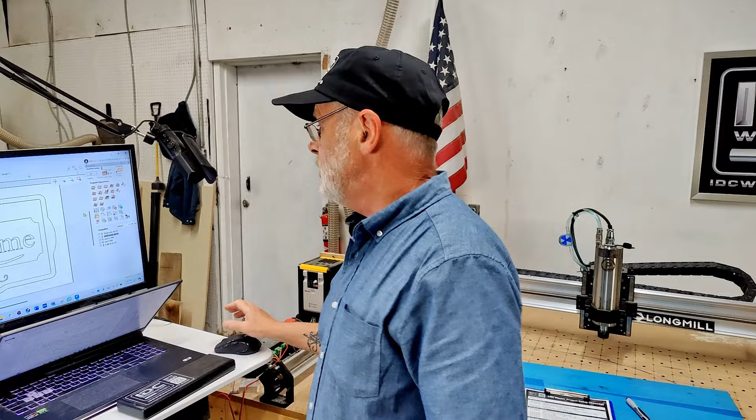So we're going to go back and take a look at this. What we're doing is we're double checking everything first. I'm in the Vectric software, which is what I recommend, and I'm going to go into the job setup, and now we're going to take a look at the material size that I've set up. So I have 24 inches wide by 16 inches tall by 3/4 of an inch thick, or 0.75.

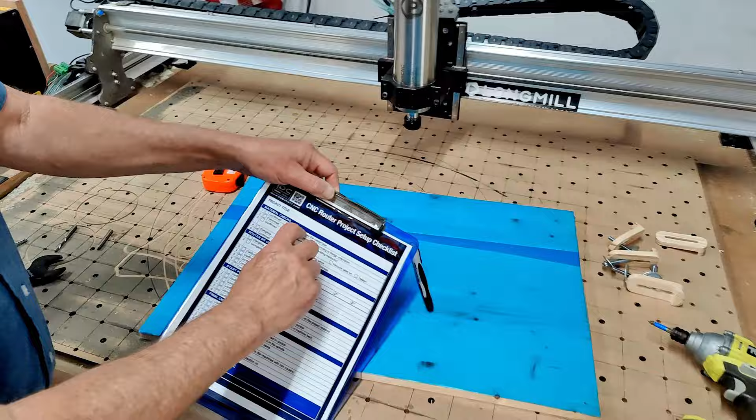So the very first thing I'm going to do on this checklist is, first of all, put on the top what this project is. It's a welcome sign. And the first thing is material size matches the design size.

So we're going to do a quick measure. And the material is 24 wide by 16 tall. And we're going to check the material thickness. Now, when you're checking material thickness, you want to use a set of calipers rather than a measuring tape, because you want to get a little more accurate.

You want to make sure that your router bit is not going to plow deep into your spoil board, and that's why we use calipers. If you don't have calipers, you can get a set off the IDC Woodcraft website. It's a very large display set of calipers, and these will give you a nice accurate measurement. You have to have calipers in your toolbox for this.

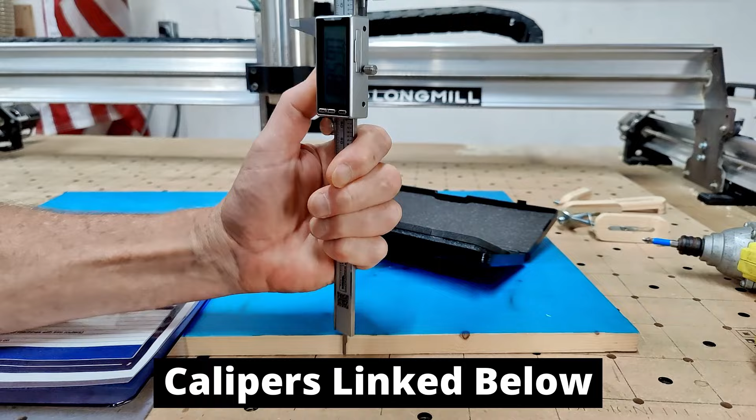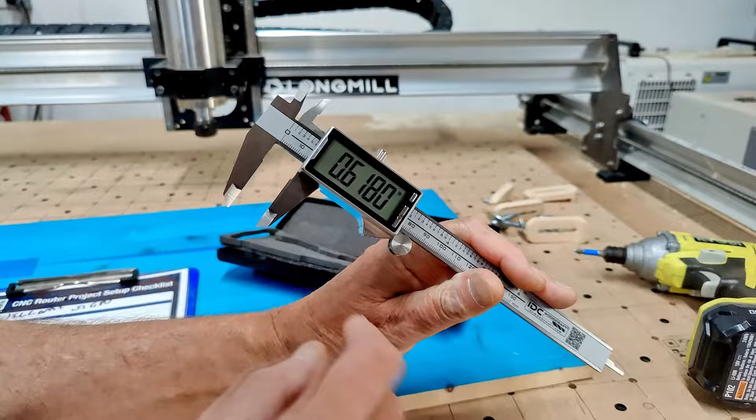So we're just going to do a depth gauge measure. First of all, you always want to make sure your calipers are zeroed out, which it is. And then we'll do that depth gauge measure, and look at that - this material is not 3/4 of an inch thick. So I'm going to do a couple of checks and just see what all I've got, find the thickest part of it.

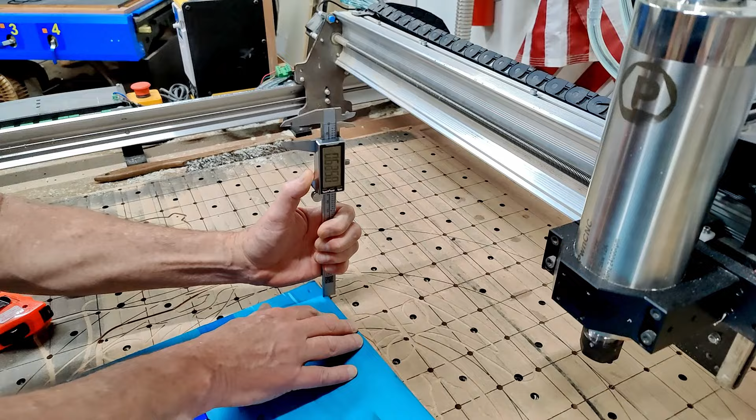And we are at 0.65 here. So what I'm doing now, just by doing this, is I am finding the high point on the project material - 0.63. Now this is telling me a ton of information right off the bat, that I have a high point, and that high point is where I need to set my Z0 at so I don't carve into my spoil board. And that high point was up in this corner right here, so I'm making a mark there.

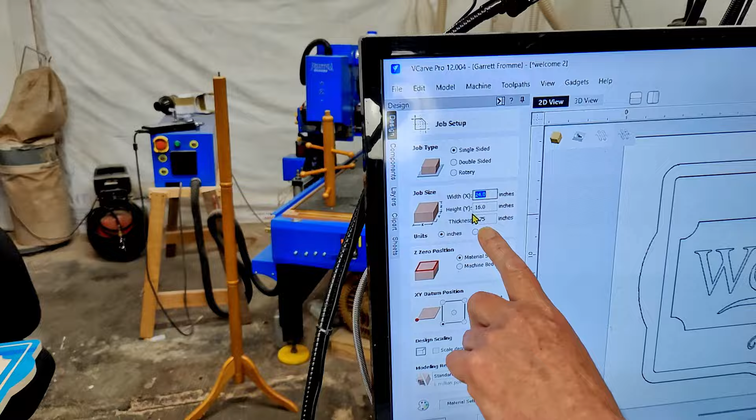So we have now double checked the material size, but we know that it doesn't match what's in the design. So I got to modify the design for that material size and recalculate all my tool paths. We're just going to go right back into it, and we're going to change the thickness to 0.65. I'm going to put in 0.654, so we're going to back that up and recalculate.

And it says, warning, the tool will cut through the material. So here's the first thing: now that I've done all the design work on this project at 0.75, all my tool paths are now set for 0.75. Now that I just reduced the whole thickness by 0.1, that means all my tool paths are now wrong. So I have to go back in and correct all the tool paths.

So we're going to take care of that right now, and then we're going to get back onto this checklist. Okay, so I checked off item number one off this list. The next item on this list is making sure the material is oriented on the machine according to the design.

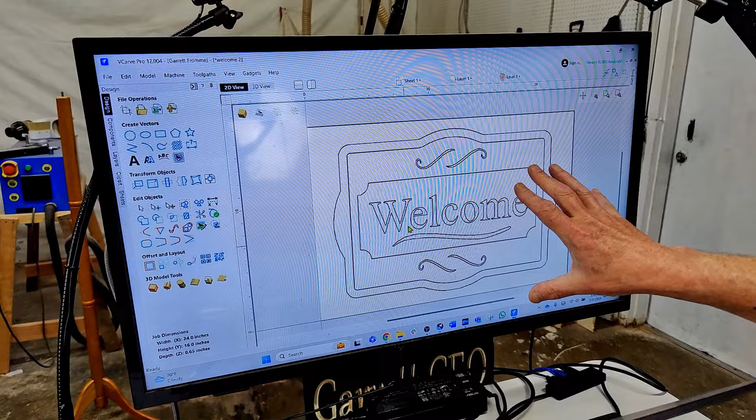So I've got a 24 wide piece of material, 16 inches tall, and that's showing on the screen here. So what this is telling me, and what it's confirming for us, is how this piece of material here needs to be sitting on the router. Is it going to be like this, or is it going to be like that? And I know that it's like this because I've just double checked it on the software, and that means that this is going to be on the machine like this. This long side is along the x-axis, so now I can double check that.

Now it comes into our clamping. We want to make sure we're clamped down, and the whole part about this is making sure that we are clamped down securely. This is the point where it gives you some thought on this project. Now I've carved this already before, and what this is doing is making sure that we have taken into account the cutout of this project.

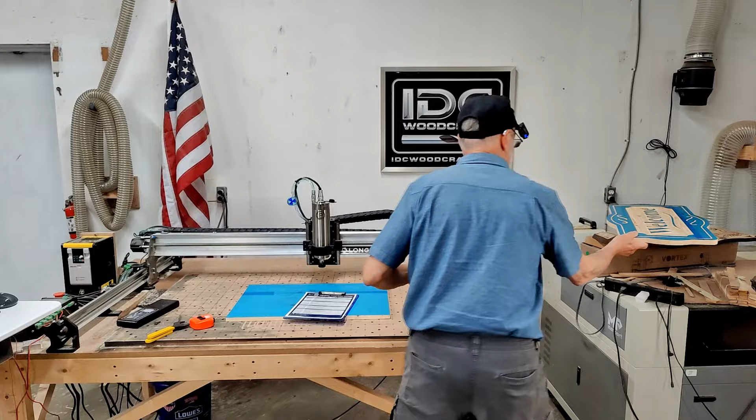Do we need to use tape? Do we need to use clamps? Do we need to use both when we cut this out to keep the project secure? So in this case, we only need clamps because I have tabs in the project. So I am now going to put clamps on the project to hold it down, and then we'll continue.

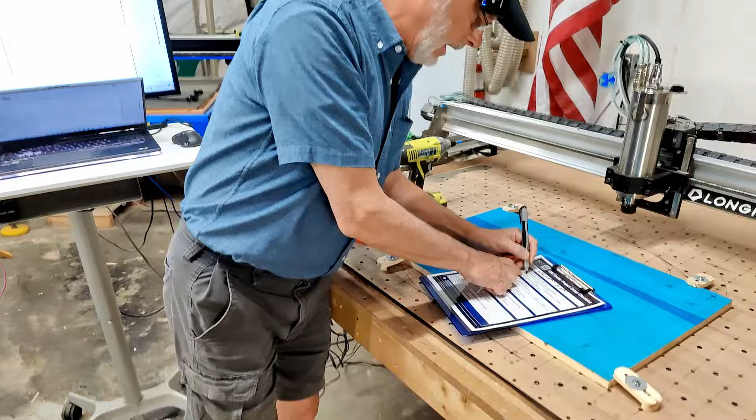So on the checklist, I am using clamps only, and I'm checking that off on the checklist, but I'm also going to make sure that the project is nice and secure. So I'm giving it a lot of force, and I'm actually jiggling my table. So the project is held up and held on the table very tightly. So I'm going to confirm that.

And what this has also done is given me some thought on where I'm placing my clamps based on where the tool is going to start, what corners it's going to start on. And that is something that we're going to be checking on later to make sure that we understand that start point. So now we know the project is secure.

Now the next step is surfacing the project. Obviously, I can't surface a project, but on here is once we get the project set down, the material is surfaced just before we start the carve.

So I have already surfaced this project, and then I put it back on. But if you are putting a piece of raw wood down, then you will definitely need to surface it, and just want to make sure you're going to surface it. This gives you thought about your carve - if this is a really fine, detailed V-carve, then surfacing is really important.

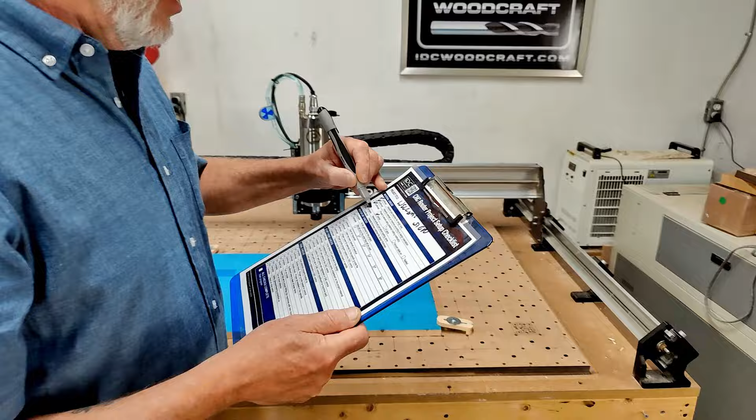We already know that this has a certain high spot on it that's about a 0.02 difference, and that can actually make a difference on a carve. This particular one, it won't, but at least this checklist gives me some room for thought on that - so checking the material surface just before starting the carve is one point where you just want to consider that.

And then finally is the material thickness matches the design thickness. I actually checked that, and we already found that the thickness was off. I already adjusted it in the program, so now we can double check that, but I'm going to confirm it - this is what the checklist is for. So we're going to go back into the job setup and make sure, again, that I've got the right thickness set up here.

So this is what we have done - we've completed the material checks. In this material check, we have confirmed the material, double-checked the material, and checked the thickness based on the design. We know that the material is oriented on the machine as it's supposed to be oriented, and we paid attention to the clamping method and made sure that we've clamped it down appropriately.

The next thing are the router bits, so we're going to now step into router bit checks. What this gives you opportunity to do is make sure you've got the right router bits selected, they're in good shape, your collet has been cleaned, and the first router bit has been installed in the machine, and a couple other things which we'll get to. We're just going to follow this checklist in order.

All the bits gathered for this project - so all the bits I've got to use for this project is the ultra clean cutting 90-degree V-bit, a 1/4-inch down cutting end mill, and the 1/8-inch down cutting end mill.

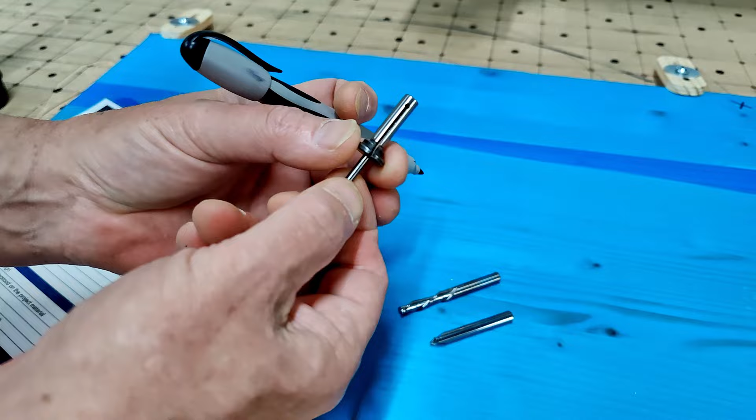I have this collet here. This is a high precision collet that you may want to get if you're using the smaller adapter collets. This is much better - it's machined with much higher standards, so you may want to check that out.

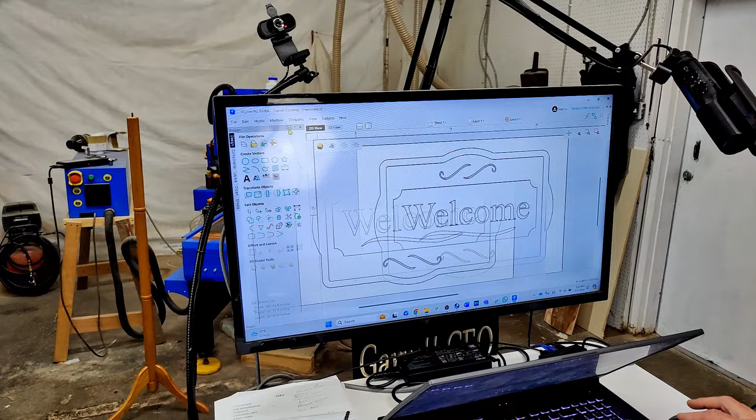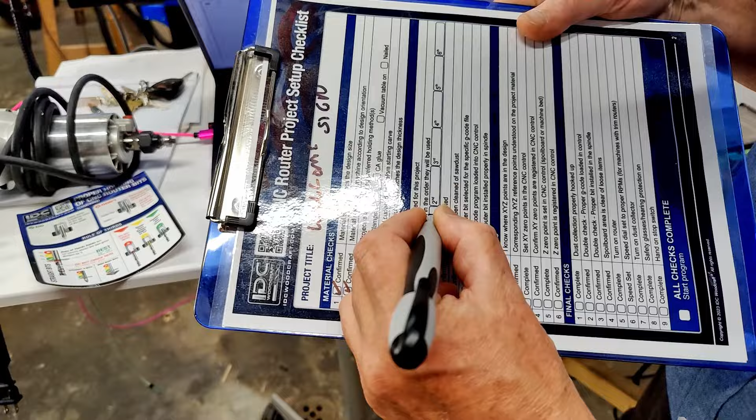I've got listed right here the name of the toolpath and the router bit that I'm using. The first toolpath uses a down cutter 1/4, the next uses a down cutter 1/8, the next two uses the 90-degree V-bit, and the final one uses a down cutter 1/4. So I'm going to mark that into these boxes: DC 1/4, DC 1/8, V90, and then DC 1/4. You can use whatever code you want so that you understand.

And so now the bits are laid out - I've got the first one there, the second one here, the third one here. I'm sorry, it's the first, see, there we go - that's why we have the checklist. First one, second one, third one, and then the fourth one. I'm going to refer back to this for the various different operations that I do, because I got to come back to the DC 1/4.

So each bit needs to get inspected. That's the next one we need to check off, because you want to make sure your bits are in good shape so that you can take a good close look at them, see if you see any chips. I like to roll them in my finger a little bit and kind of try to turn it while I'm rolling it in my finger, then just roll my finger down gently, because it is a sharp edge. We're feeling the edge of the bit and making sure the edge is still sharp. We're going to do that for all the bits, and just get a close look.

You can see this one's been used, so it's got some buildup on it, and so I'm just going to check the cutting edges with my finger. I'm pretty comfortable with that. And we'll do that with the 1/8 down cutter - do the same thing.

And that feels good as well. So my bits have been inspected. Now the collet needs to be cleaned of sawdust.

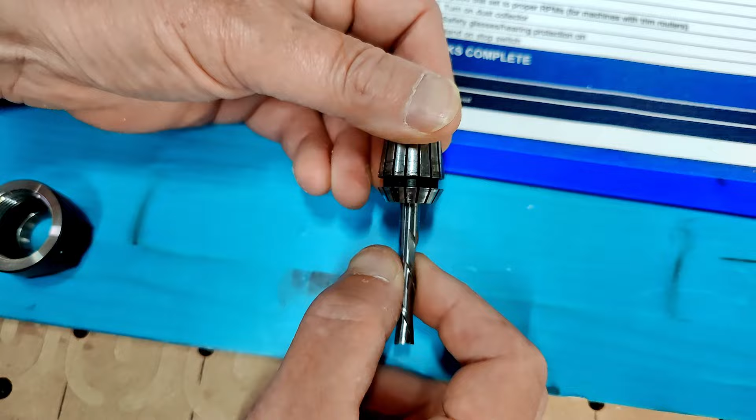This is a big thing that many creators don't realize at first. Cleaning your collet, that's the part in your machine that is actually holding your router bit. As you're doing carves, sawdust will get up into the collet, and as you take bits in and out, that sawdust gets in between the bit and the collet itself. Then you clamp down on it. That little bit of sawdust that gets in between the router bit and the collet actually acts like a ball bearing. When you start to carve, you'll start getting something called bit slip, meaning the router bit actually starts to slip out of the collet, and the carve gets deeper and deeper, and you usually don't notice until it's too late.

So every time you change your router bit, you have to clean your collet. Every single time, not just the collet, but the collet nut as well. Giving it a good close look, you can use a toothbrush to get into it and clean that out. I don't see any sawdust in there, so we are going to check that off - the collet has been cleaned.

The next is the proper router bit has been selected for the specific G-code file. I'm running 4 different G-codes. I have 5 tool paths, but two of those tool paths are merged into one. So I need to load that G-code up into my control software in order to know exactly what that is.

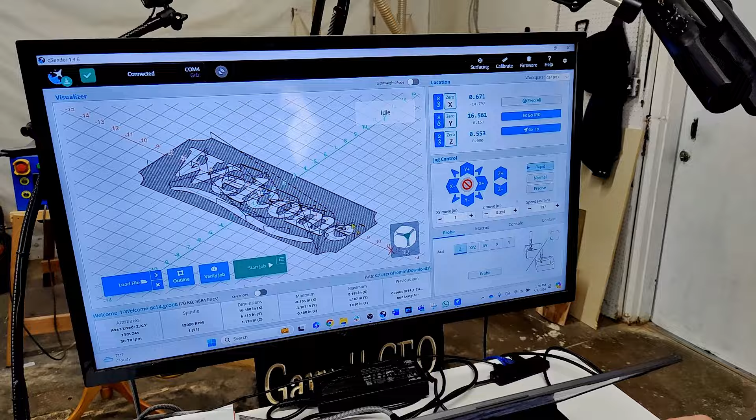So I'm going to open up gSender, and we're going to just load it to make sure. So welcome, and there's toolpath number 1. That's the one I want. And it says, let's move that. It says DC14, that's what I want. So that's the one I need to load into the software. Now I've got it there. We're ready to go, I've got that loaded in.

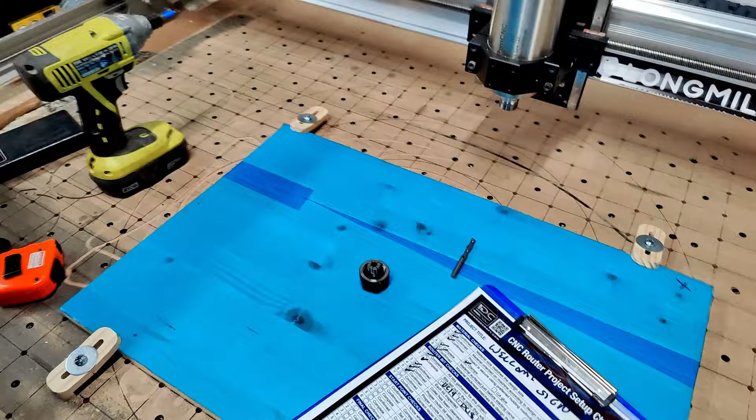So I am going to double check that. Now, one of the things is when we're doing this, we're going to come back around here. When I go to the DC18, we're going to come back to the router bit check, and we're going to start running through this again. So I got the proper router bit selected for the specific G code, which is the 1/4 inch. So I want to get the other ones out of my way, I'm going to set them to the side here for just a moment.

And the proper G code program is loaded into the CNC control, which I just did. So we're going to do that. And the correct router bit is installed properly in the spindle - that's the 1/4 inch router bit.

So basically, this is like a baby step type of list that's making sure I am following a bunch of steps. You can see already that this is forcing us to slow down. It's kind of a pain in the ass to do this kind of thing, but this is what's going to prevent you from, or at least minimize, mistakes that you just don't want to have in your carve because you forgot to do something. This is covering everything.

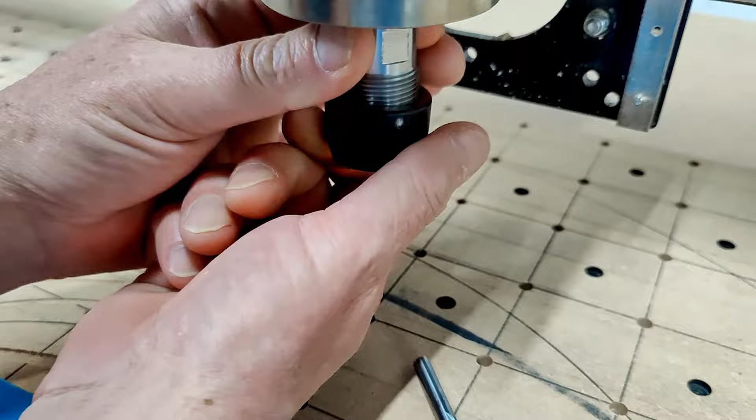So we're going to install the 1/4 inch router bit in here, and this is where we want to pay attention. Now, this list says to install your router bit properly. So what is proper router bit installation? That's where this little thing comes in, this little sticker right here. There is a proper way to install your router bit, and there's not a proper way or a wrong way to install your router bit.

First of all, you never want to butt your router bit all the way up inside the collet where it stops. That area up there can be cut incorrectly, like at an angle or something, and when you butt the router bit up in there, it can actually put a side stress and break the top of your bit. The next thing is the rule of thirds.

When you are putting your router bit into the collet, you can just kind of divide your shank into 3 visually. There's the top third, the middle third, and the bottom third, and those thirds are based off what they call the flute washout. That's where the grinding tool actually leaves the router bit right there.

From that point, you're dividing things into thirds. You always want to go up about 1/8 of an inch, and that would actually be the technical place where you start your third. Visually divide that into thirds and then refer to this table here. You want the first third to be exposed no more than the first third of your router bit. That's good. Then you can run your normal feeds and speeds.

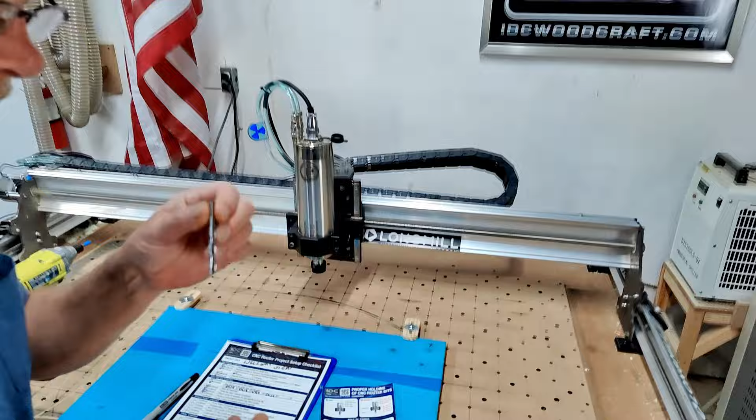But some people like to try to get more length out of their router bit to get more depth, so what they do is they actually pull that router bit further out of the collet. That puts a lot more stress on the router bit, and that leads you to potential for breakage. If you have to bring that out to the second third of the bit, so you're grabbing to about half of the shank, now you have to start slowing your feeds and speeds down on your router bit because you don't want to stress that bit. You'll break it.

And then finally, don't hang your router bit way out like that in the last third, just like we've got on the table here. If you are doing that, you are setting yourself up to break your router bit. And router bits are expensive. You don't do it. I'm a CNC expert, I've been doing this stuff for years and years and years. So don't ever stick your router bit out like that.

All right, so we're going to install this with the first third, in the first third. Slide that thing up in there somewhere. There we go. And I'm visually down at the bottom looking at that, what they call the flute washout, that's where the grinding tool leaves. I'm putting my finger just above that, about the first 1/8 of an inch, and that's going to be my stop point. And that's how you install a router bit, and that's the proper way to install a router bit. And then, of course, we want to make sure it's nice and tight.

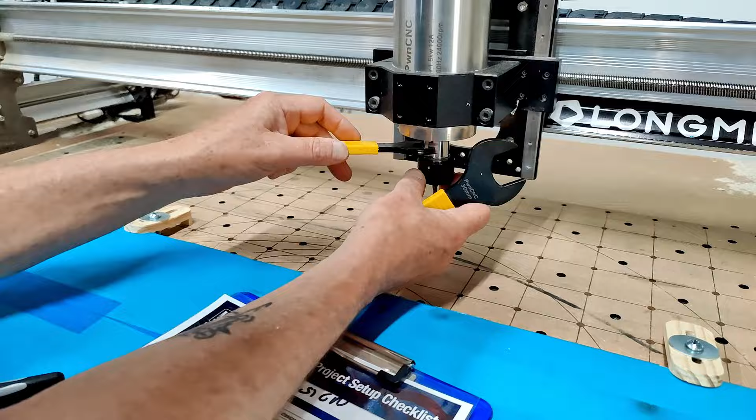Okay, there we go. When you do this, you don't need to over tighten. You want to get it to a point where it doesn't move anymore, and just give it another little pull, and that router bit is ready to go.

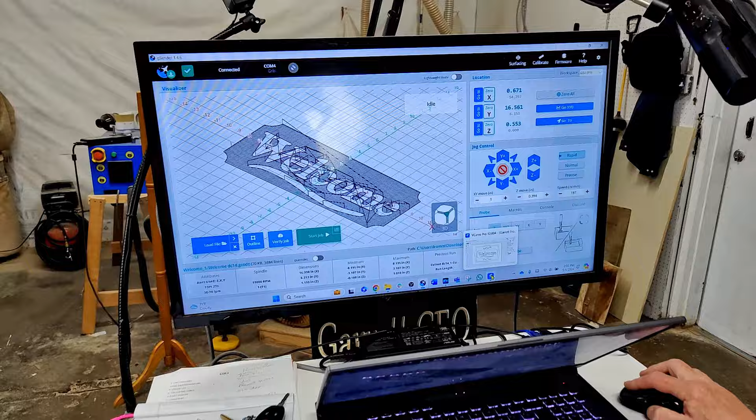So the first thing is we need to know where the X, Y, Z points are in the design. What that tells me is I've got to go back to my design again and confirm where I've established my X, Y, Z 0 points. So we can go into the job setup. I can see my X and Y is the lower left corner here, just by these axis lines. But where's my Z? Is the Z on top or on the bottom?

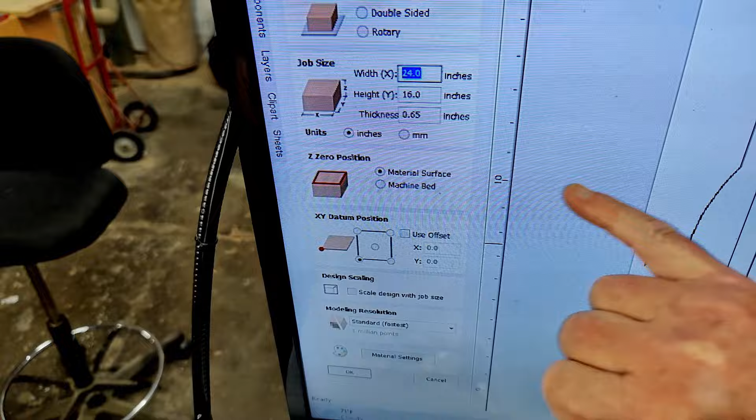We're going to open up that job setup again, and my Z is set on the material surface right there. So that means now I know that this corner right here is my X and Y point, and the Z is the top of the material.

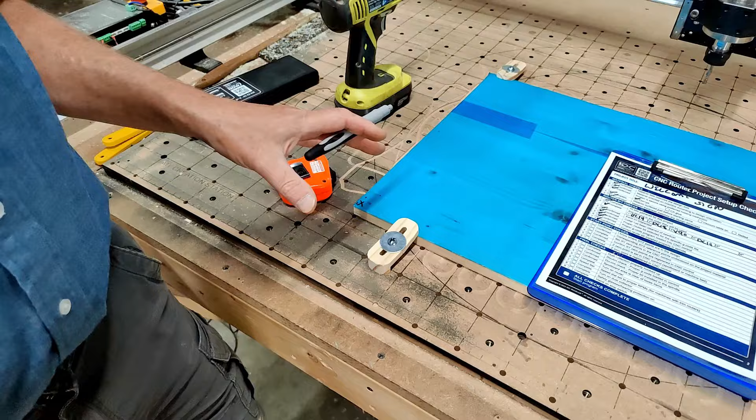But because I did accurate material checks with a set of calipers - and if you think you don't need a set of calipers, then think again, because this is going to help you make sure you're doing things very accurately. CNC routers are very accurate machines, so you want to use tools that are as accurate as you want them to be for the caliber of the machine.

I know my high point is over here, so I'm going to actually write that on the board: high point. And what that's telling me is I've got to set my Z over here. Now I know where the X, Y, and Z 0 positions are in the design.

So I'm going to check that. Now the corresponding XYZ reference points are understood on the project material. So I've just checked that. I put my little X right here, I've got my high point right there, and I can check that off.

And now it is set the XY 0 points in the control. Now you're going to notice I didn't say let's set the XYZ - that's because sometimes we will set X and Y separate from setting our Z. So I'm going to set the X and Y on this. You can do it two ways: with a probe, or you can eyeball it. In this case, I'm going to eyeball it.

I'm just going to align the center of the router bit along this plane and that plane, and then we will set our Z. So I'm going to go ahead and take care of that right now.

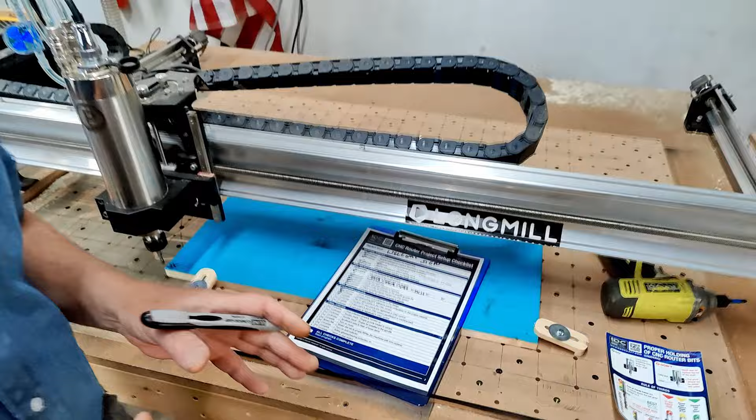We'll be right back. Set the XY 0 points in the CNC control. I have now done that - I've done it manually. I brought the tool forward and eyeballed it along this way, making sure my router bit is centered along this plane and this plane. Then I went into the control, and now my X and Y is zeroed. So that's taken care of.

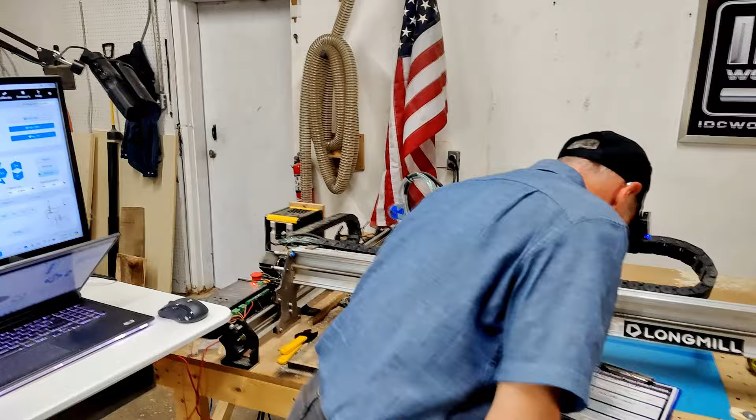And then we want to confirm XY points are set in the control. Now, this is something really important that I don't think I've ever seen anybody think about, but it happens from time to time. If I was using a probe to set this, the machine will run through its cycle touching the probe, but I have seen it where it actually did not take it in the control.

That's why we just go into the control and double check after we set our 0 that it's reading 0 right here. So now we've confirmed that the XY 0 points are set there. The machine's in position, I've got the zeros there. And then we're going to get on to setting the Z 0 point. Now, if you're using a three-axis touch plate where it's doing the Z and the X and Y at the same time, then you're processing through all this at once, because these last two steps are making sure you're setting your Z.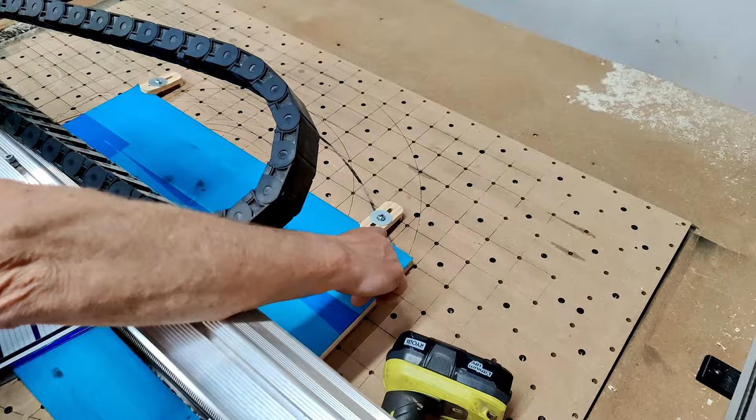So this is divided because it's based on if you are doing things manually. I'm going to come over to this corner and use my Z probe to touch my bit down over here. That's my high point, that's what I want to work with. So I'm going to take care of that.

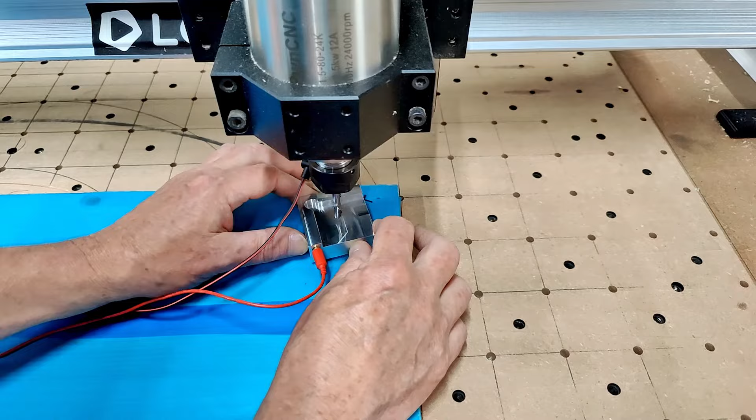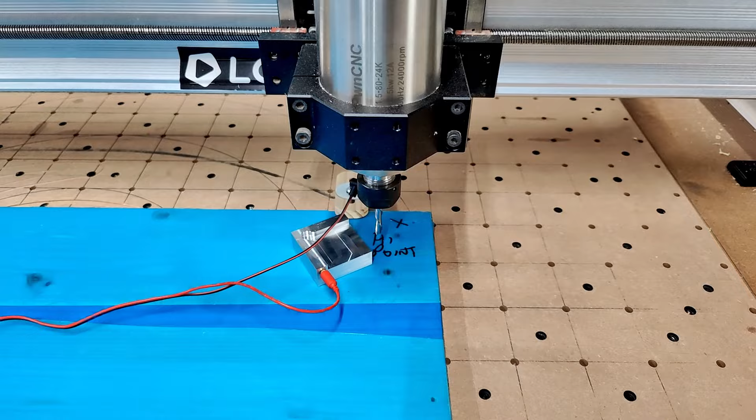Then we're going to get on to the final steps of this setup checklist. I'm about to set my Z value, put my probe in place, and I need to bring the Z down before I start the probe cycle. And I want to warn you, never ever adjust your Z with the probe plate underneath it. Just move the plate to the side and bring the Z axis down to where you want it. We're good there.

Now I'm going to start the probe cycle for the Z. I'm going to confirm that I'm doing Z in the software, touch it like it's supposed to, and then run the cycle.

All right, now finally we're just going to double check, make sure the Z has set itself properly. So I've just done this step here, Z zero point set in the CNC control. I did that with the touch plate. And finally, we're going to make sure that the Z zero point registered in the CNC control.

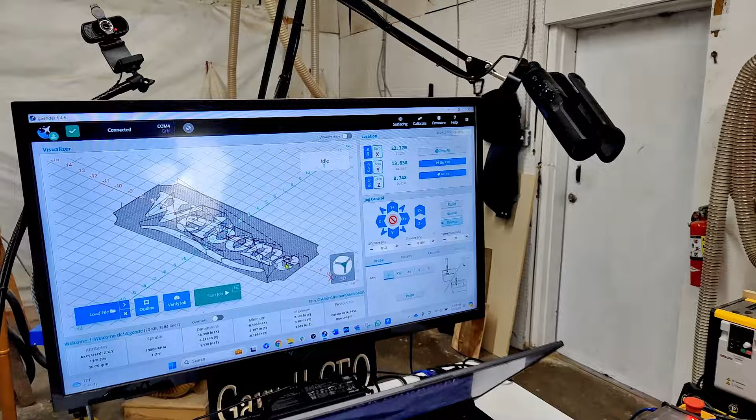So the way we're going to do that is I'm going to move the router away from the material, and I'm visually going to look at that. We're just going to move it back over there, and I'm going to tell the machine to go to Z0. Then we're going to eyeball it, and I'm comfortable with that.

We have now completed our XY Z0 check. I'm looking in the control—right here it says Z. So now I've double checked this.

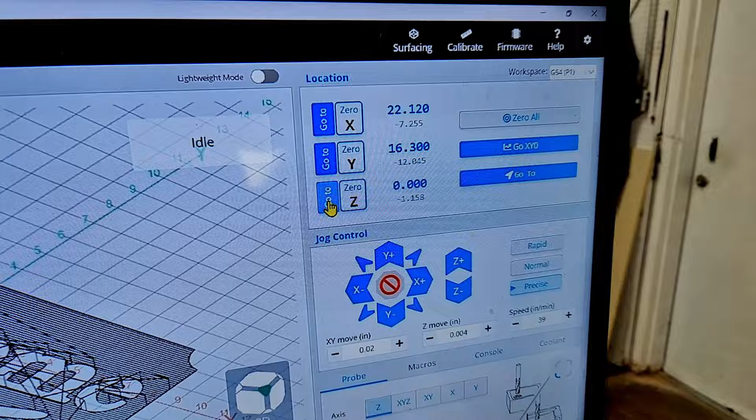So we've gone through a lot of stuff here, lots of little steps. This is what I want to point out to you: these double checks we don't do when we're doing this kind of stuff normally—we just kind of run through the process. But these double checks are making sure that you are following procedure. This procedure is a vital part of your whole process, and setup procedure is the most important part of the process.

So we've run through all this checklist. Now we have our final checks to do, and these final checks, for the most part, are just going to make sure that we did what we said that we did. So one is the dust collection is properly hooked up. I'm not going to do that because I'm not actually going to create this project, since I've already done it. So if I'm not doing it, then I can't check that off.

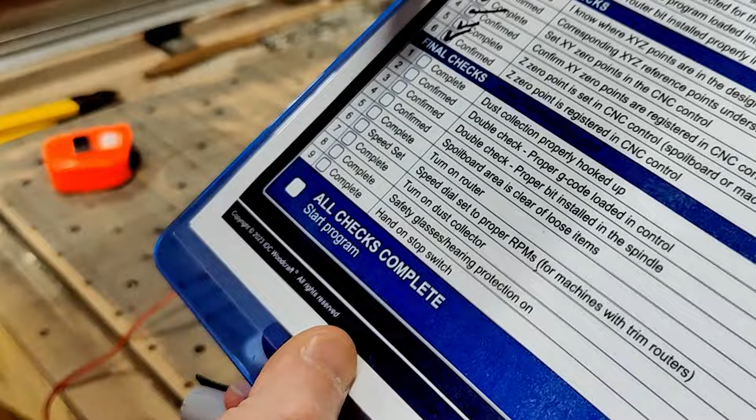Now we're going to double check that the proper G-code is loaded in the control—there's another double check. So I'm doing this one, it's listed over here, number 1. It's that part of the welcome. We're good with that, so I can check that off.

I'm going to double check that the proper bit is installed. It says DC14, and I'm confirming I have the down cutter 14 right there. So I'm going to check that off.

And then the spoil board area is clear of loose items. What that means is I need to get my touch plate off of here, my tape measure out of here, my checklist out of here, and all the other stuff that may be on the spoil board. We want everything clear. One thing probably needs to be added to this list is make sure that you move the router over to the start point, but that's not on there, so I'm going to do that. The spoil board is clear.

The next step is turn on the router. I've seen too many people do this, especially if you have a trim router like this on your machine where you have to manually turn it on—we forget from time to time. Like I said, I've done it, I've seen other people do it too. So we literally want to turn the router on by using the router on switch.

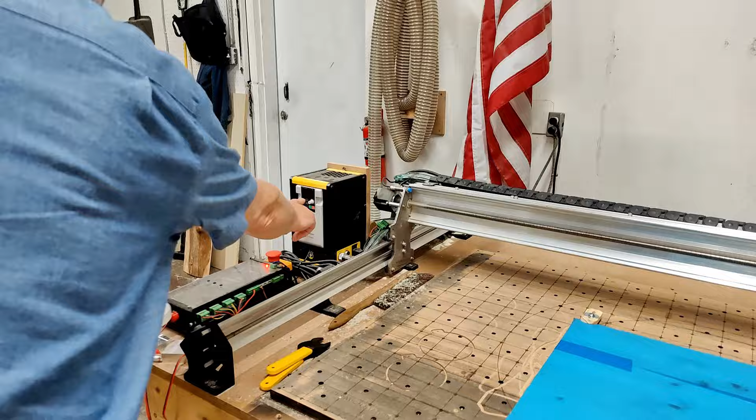In this case, I know that my spindle is turned off. This is making me look at my spindle control, and there are no lights over here saying that the spindle is on. So now I need to turn the spindle on, and I have to wait for the lights to come up, and go through the procedure to make sure that spindle is up and ready to go, which means I have to push the go button on it. But in the meantime, I'm going to bring the router bit over to this start point here. We're going to raise it up.

Make sure I'm clear visually, and then I can start moving the machine over. Now I can tell you I just did something wrong in this whole checklist. I started to do some other stuff when I didn't finish this one checkpoint. I needed to stay with the spindle until I knew it was turned on and ready to go.

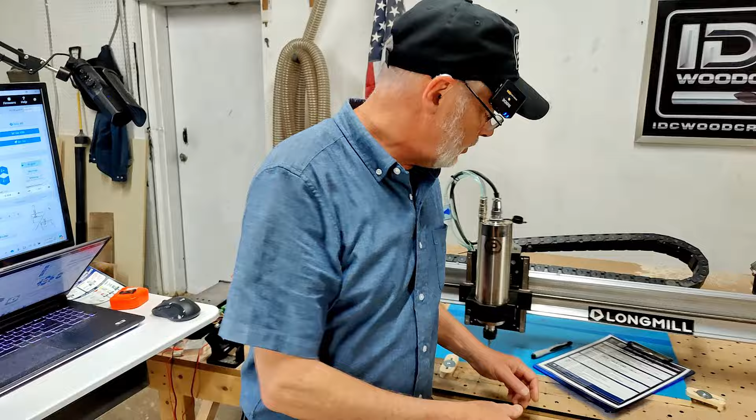My own fault. So I got the spindle ready to go, it's reading what it needs to read. We're going to say we flipped on the router. If you have a trim router, then we set the speed on the router. If you have a spindle, that's going to be set in your database in the Vectric software, that's taken care of. But if you have a trim router, you've got to set the speed dial right there.

So we're going to set the speed dial just so I can say that we did it. This is a 1/4 inch router bit, and I know that goes to 3. If you don't know what to set your router bit at for the different spindle speeds, you can always get the IDC Woodcraft phone app.

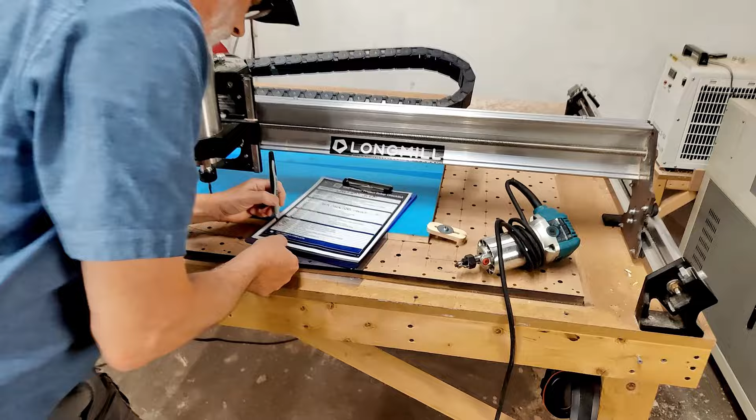And then finally, most important, the very last item is being able to stop the machine before you hit that start button. So whenever I start a program, we're putting our finger on whatever stop button will stop that machine from running. On my LongMill here, I've got a pause button, that's the button I would use. We've also got an e-stop right there, ready to go. You put your finger on the stop button, you check that off, and you're ready to rock and roll. You can mark down all checks complete and hit your start button.

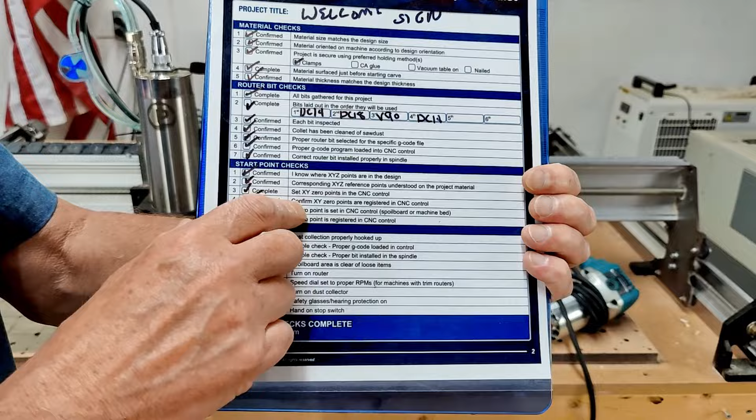And when you switch router bits, you need to start over again from the second part of the checklist, router bit checks, because you're going on to the 1/8 inch router bit. So you need to make sure everything's checked, you need to make sure your Z is checked. That's the other reason I've got that separated from X and Y, because we've already set our X and Y, we don't need to change that. We do need to change the Z. And then you go through all the rest of the checks.